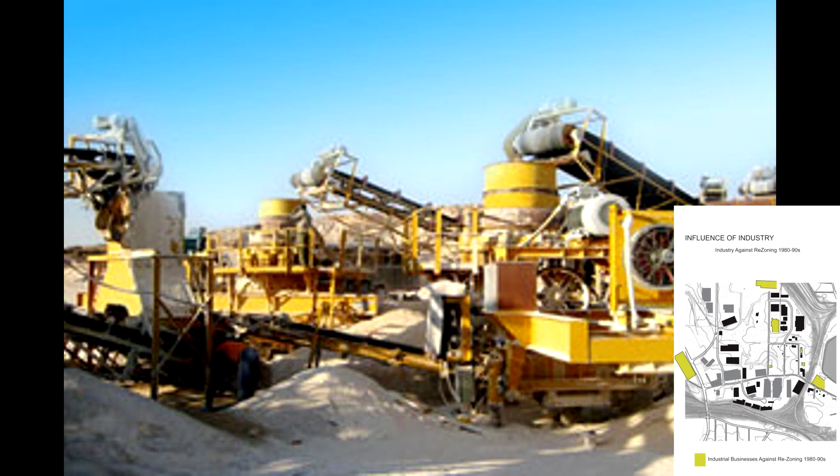Attempts to have it rezoned back into a residential district in the 1980s were defeated by large industrial companies, namely Nottingham Chemical. Blandtown is still zoned as an industrial area, but now most of the industry has relocated to other areas in the city, leaving many buildings on the existing site abandoned or underutilized.

In the last 20 years, a new demographic has appeared on site. The light industry has been replaced by the design industry that has taken advantage of a plethora of space given by vacant industrial buildings to use them as showrooms or inventory for high-end designer items. Along with this group are young professionals who, drawn to various hip restaurants and clubs in the area, have sparked new development as part of the growing West Midtown area.

New apartment communities provide housing for these young professionals, but they are turned inward and poorly activate the streetscape. The diversity of occupants can grow to further utilize the site if there were not environmental problems left on site from its heyday as an industrial district.

Due to the light industries that have polluted the site, the EPA has declared it a brownfield. Sustainability and the local ecology are central issues of the site and therefore this project.

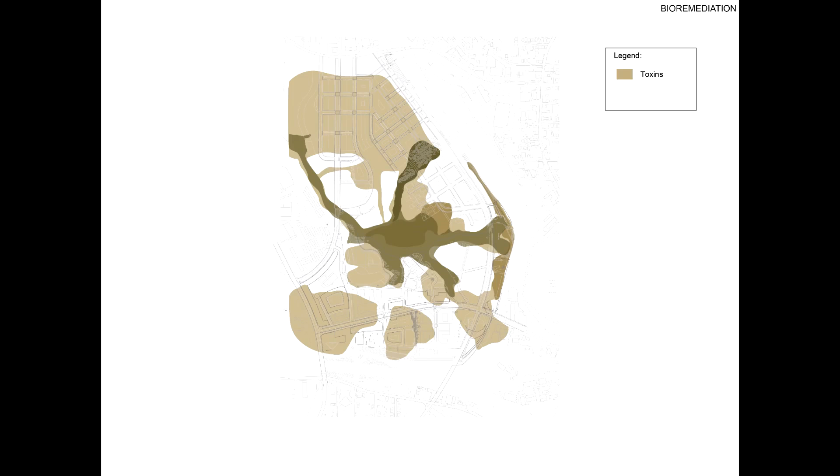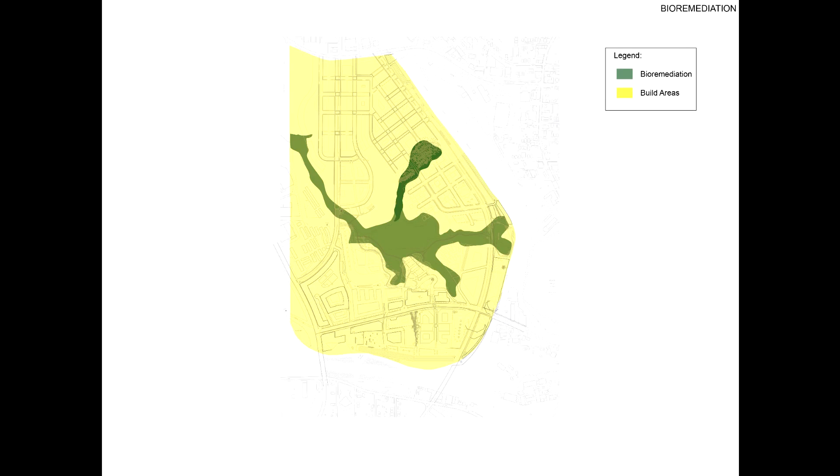In order to make the area safe, several steps of remediation taking an estimated 30 years will have to take place. The first step is to match and introduce plants that are effective in removing each of the toxins. This 4-phase remediation process will restore the soil and release land for development.

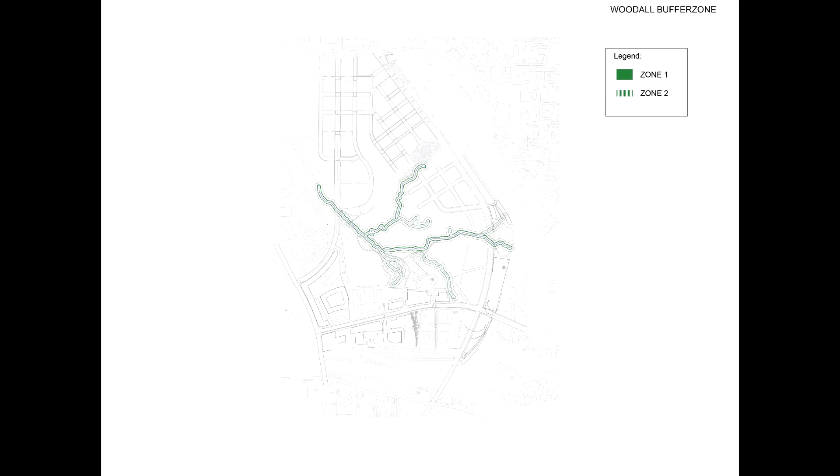Incorporating sustainable technologies was also part of the overall strategy. These included solar, piezoelectric, and water management systems.

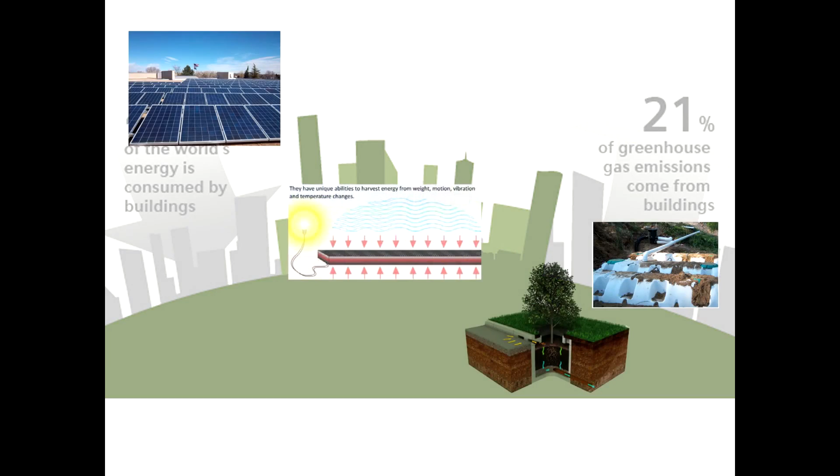In examining the amount of energy used by the average household, we found that a typical individual family unit uses an average of 11,500 kilowatt hours per household monthly. This approximates to 138,000 kilowatt hours per year.

We determined that it would take 6,300 kilowatt hours of stored solar energy to power 2,300 square feet, the size of an average household in Georgia. Tall buildings have much more energy consumption and therefore require 18,000 square feet of solar energy panels for an 11,000 square foot of occupied space.

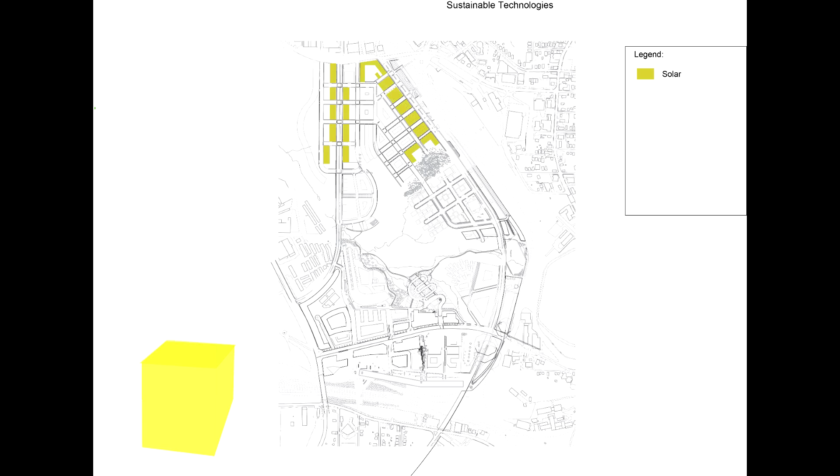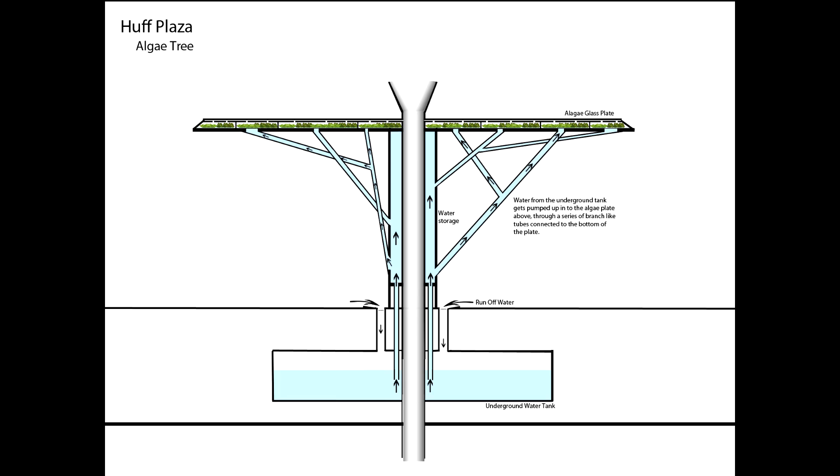Another renewable energy source used were algae trees. Algae trees are actually artificial structures designed to replicate the natural process of an actual tree in areas designed for human occupation. Algae trees utilize photosynthetic properties of microscopic algae by capturing sunlight, water, and carbon dioxide in order to produce biodiesel and generate electricity through the use of underground generators. The algae trees range from 18 to 20 feet in height and 24 feet in canopy span.

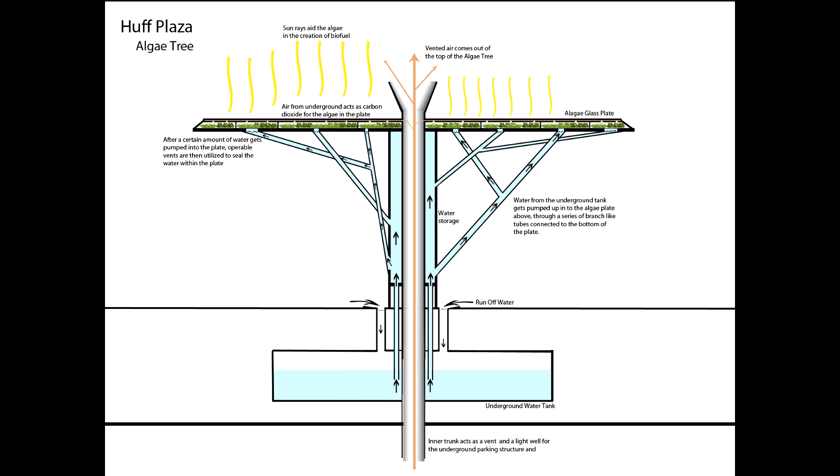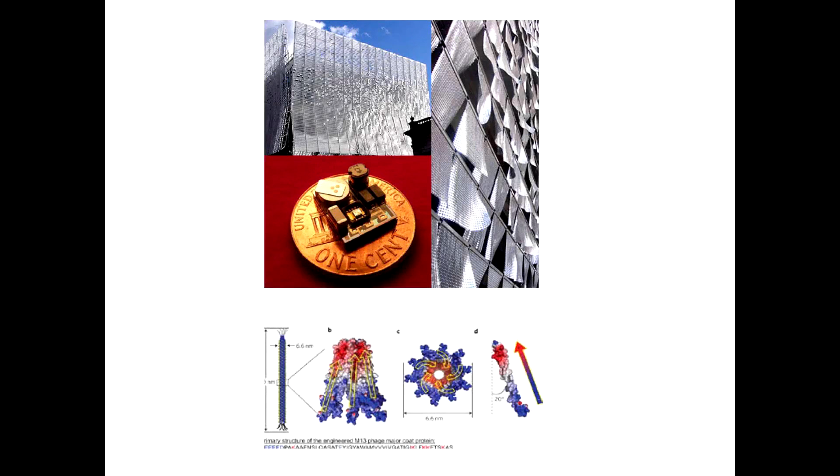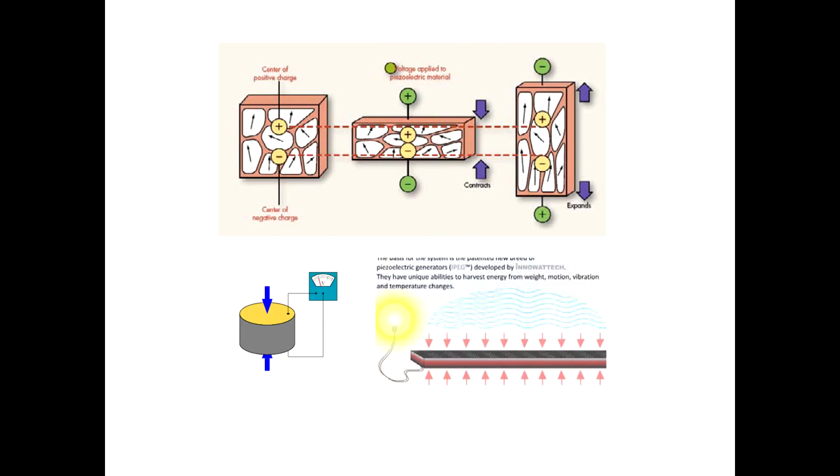Another renewable energy source utilized throughout the site is piezoelectric energy collection. Piezoelectricity consists of electricity generated by the pressure of the tiniest vibrations into an energy collection source. While Georgia is not windy, areas that are densely populated with vehicular traffic or rail lines provide enough wind gusts to activate a piezoelectric windstalk or fabric screen.

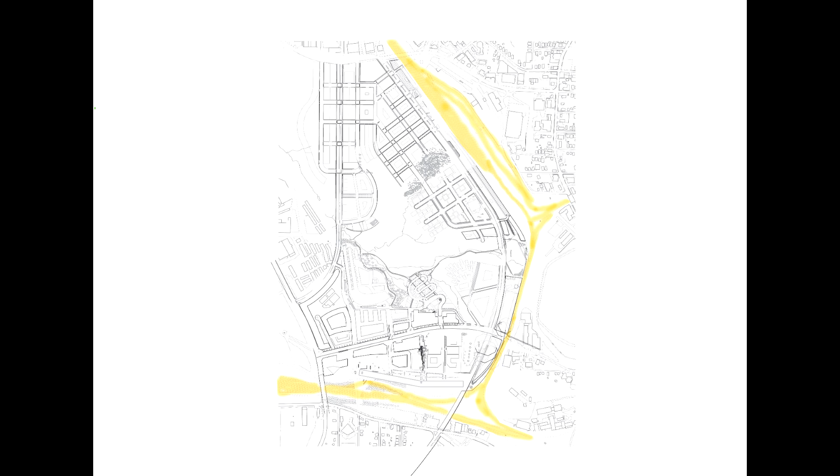270 square feet of piezoelectric fabric used as a building skin can create 34,000 kilowatt hours of energy per day. That is enough to reduce energy consumption of the large buildings on site by 26%.

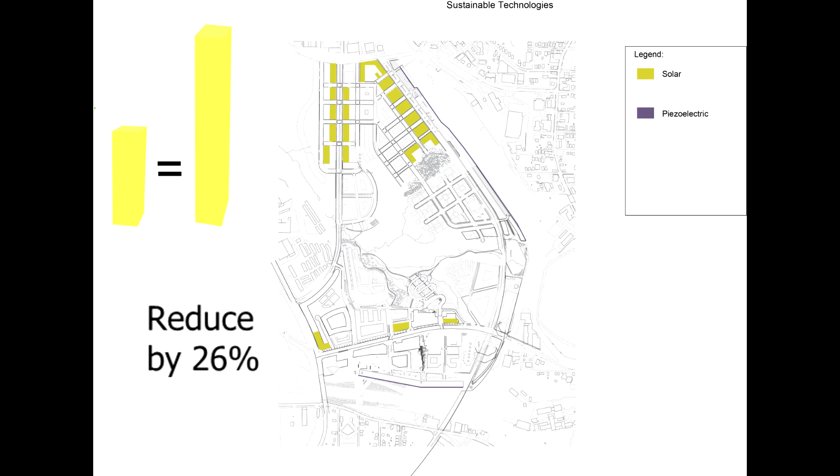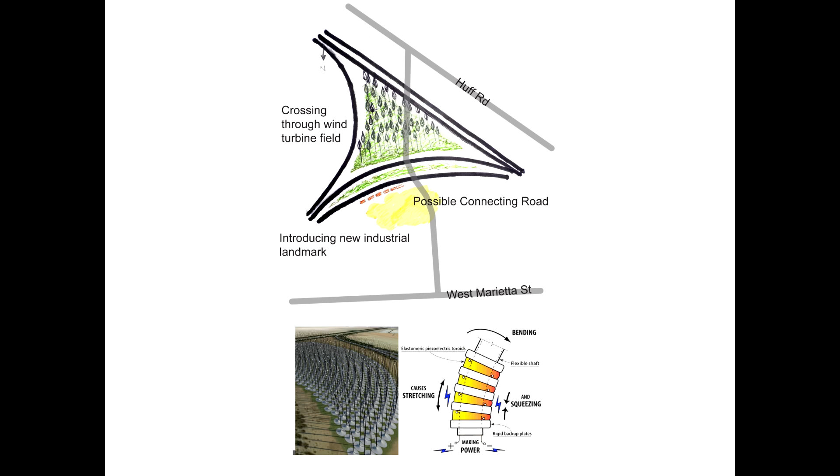The master plan incorporates a piezoelectric field in the southeast quadrant between the rail lines. The long mixed-use megastructures are also skinned with piezoelectric screens along the facades that face the tracks.

Sustainable water management was also important for the site. The average American is estimated to use 25,000 gallons of water per year. This means for the 15,000 inhabitants, the district will require 383 million gallons of water annually.

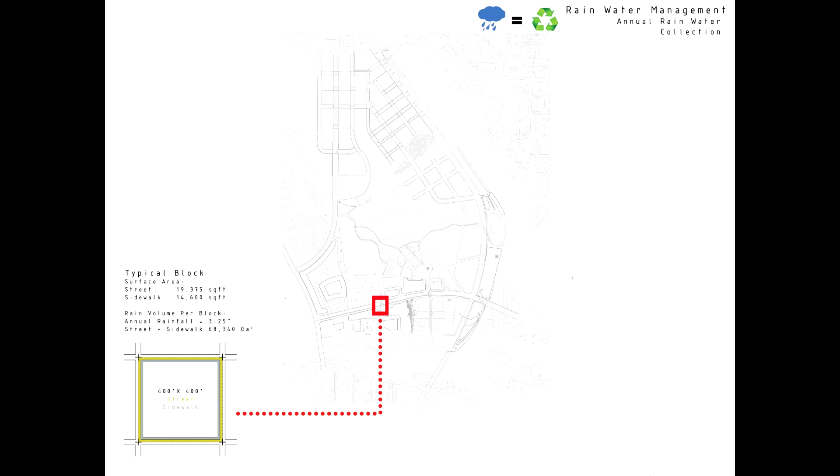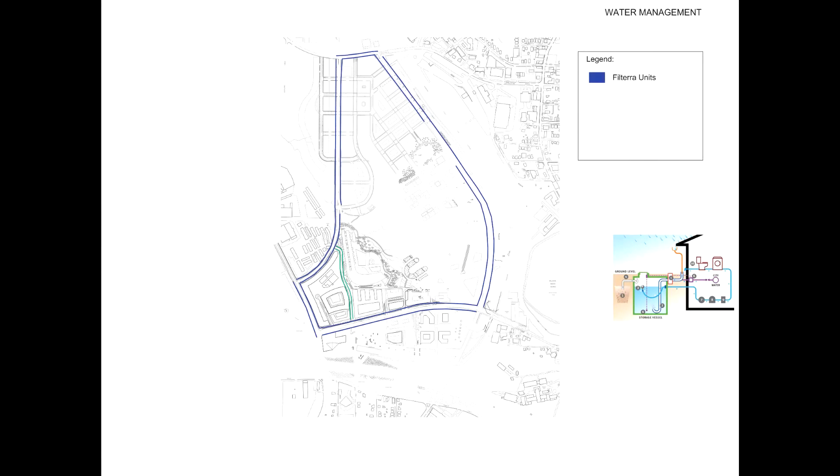In Georgia, the annual rainfall is 50.2 inches, which roughly translates to 31.12 gallons per square foot. At 13 million square feet, roughly 395 million gallons of rainwater falls on the site, a sufficient amount to meet the residents' needs. Our strategy called for capturing, filtering, storing, and reusing as much water as possible.

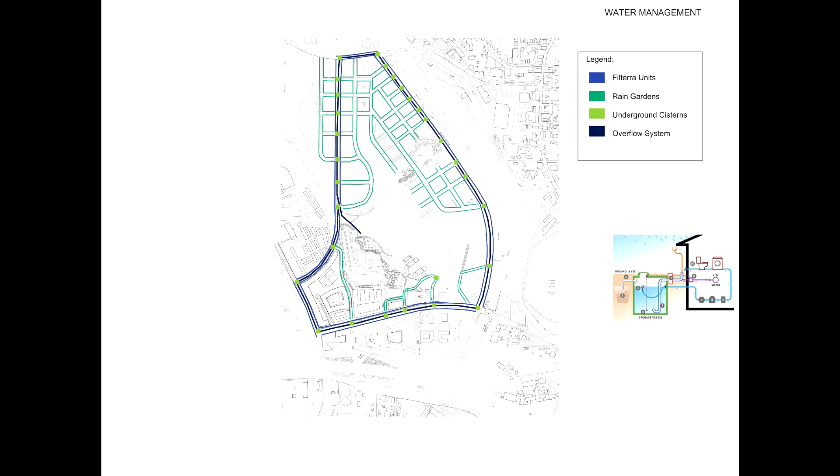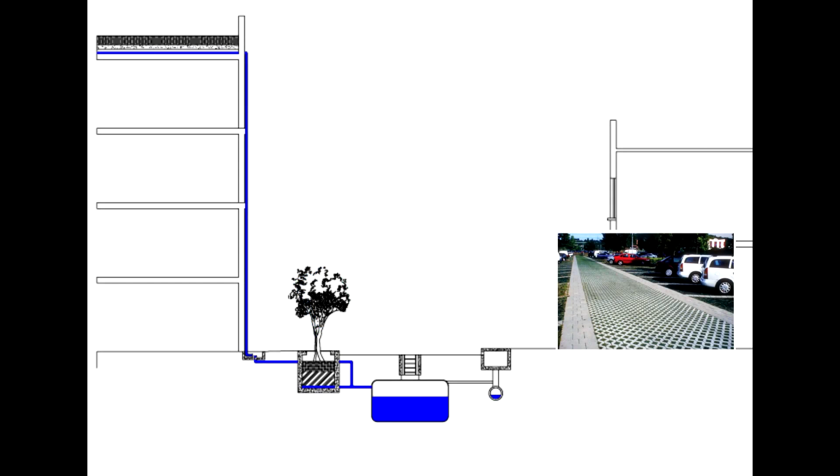The master plan incorporates approximately 100 million square feet of water gathering area, feeding the water collection and purification tanks throughout the site. This amount of annual water collection can reduce the need of external water by 50% for the entire 9,000 occupants. The stormwater management system will collect street water runoff, purifying it through a natural vegetation and soil filtration system before going into the waterways that feed the Chattahoochee River.

For a more subtle, yet constant water collection, fog catchers are strategically placed throughout the site. With this method, the humidity in our climate can be used to our advantage. Fog catchers are composed of a mesh fabric that collects dew in the atmosphere and allows it to trickle down to a cistern at the base.

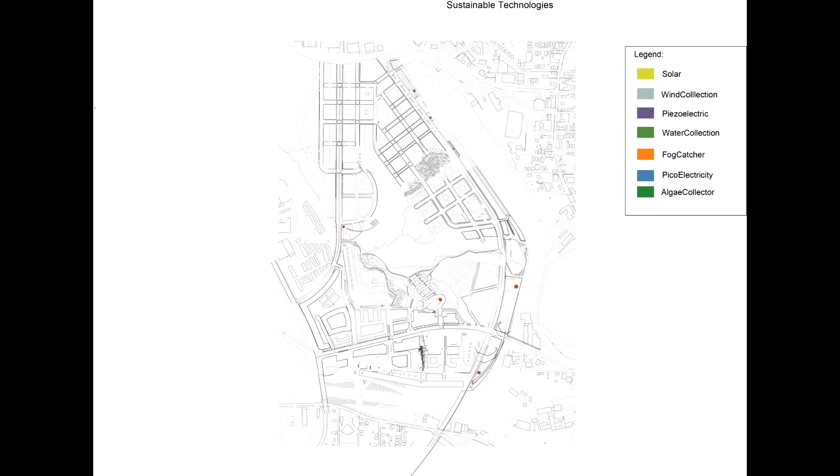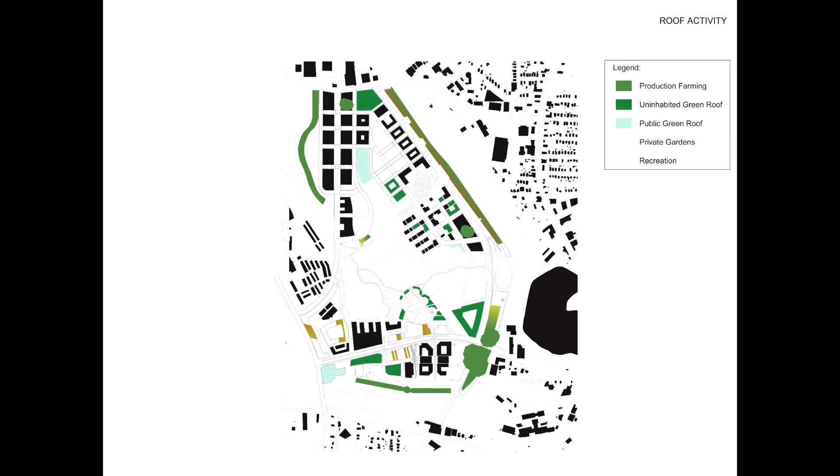Green roofs are also a component of stormwater management. Not only do they utilize water that falls onto the roof to nourish the plant life, the green roofs also naturally filter and provide gray water for the building once the water collected and used for plant life reaches capacity.

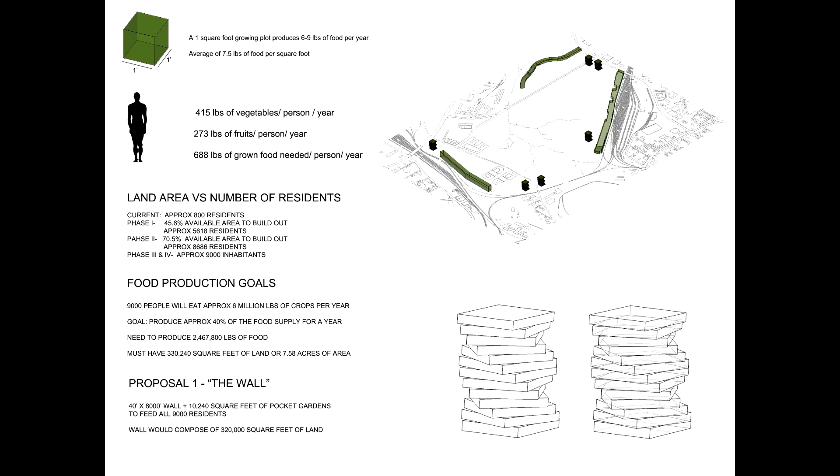Carolyn Steel's lecture, How Food Shapes Our Cities, presents the argument that there is a huge need for farming within the cities so that individuals may maintain a replenishing and healthy diet. To complement the sustainable energy systems, we decided to incorporate urban farming, which will provide approximately 40% of food source for the occupants.

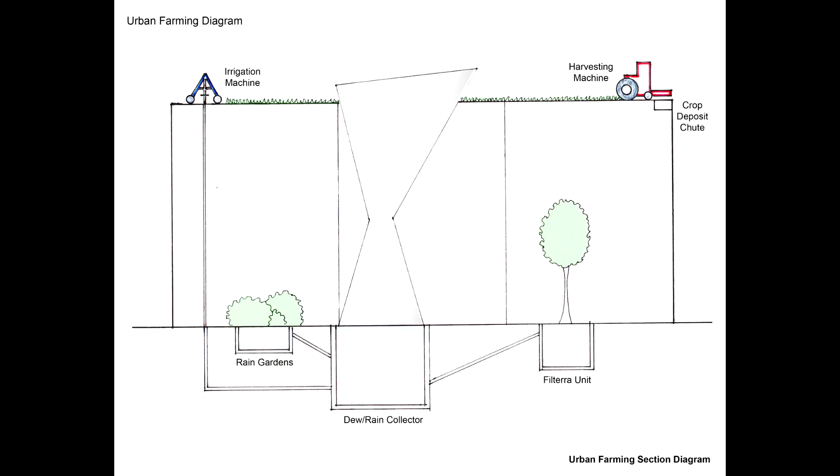Two types of industrial agricultural infrastructures were used to address the needs of food sustainability in this district: the rooftop promenade and the vertical farming towers. The roofs of the megastructures are dedicated predominantly to industrial agriculture. An extensive promenade provides visibility and access to the production while simultaneously providing panoramic views of the area.

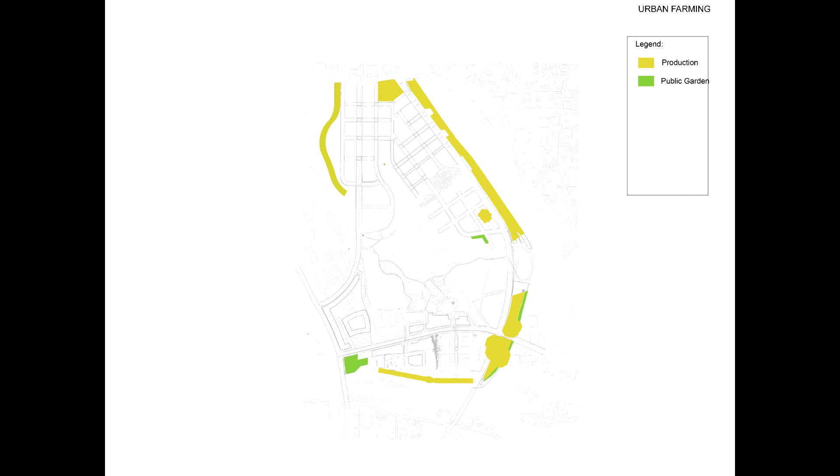To supplement the megastructures, vertical farming towers were also used. These vertical green structures act as gateways into this district and signify the change from the existing culture to one that is more sustainable. The site contains several distinct topographical features that were taken into consideration in the master plan.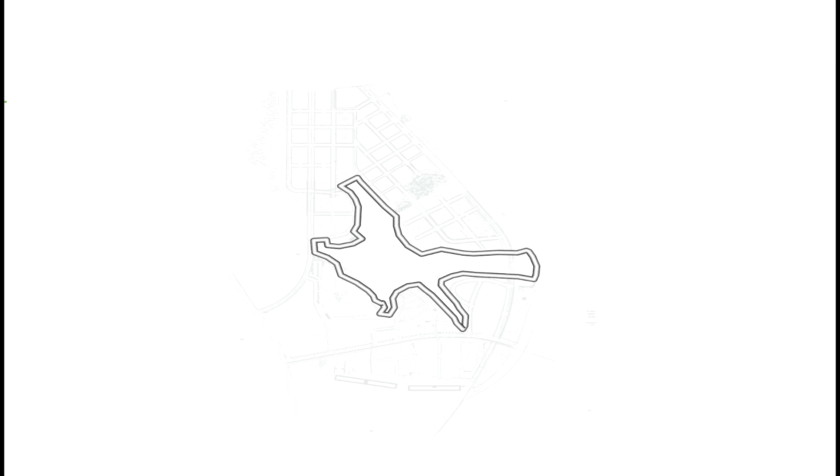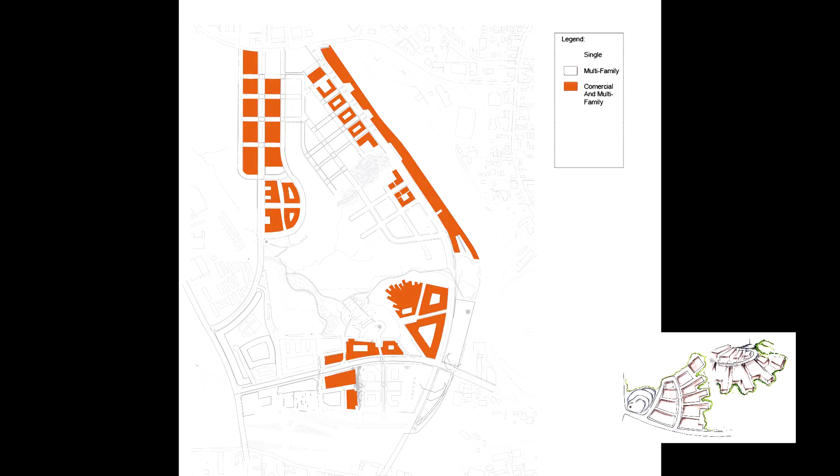Steep slopes along the edge of the Woodall presented roadway, development, and accessibility challenges. In these areas, we incorporated single and multi-family housing that stepped down the slopes like fingers, holding the natural landscape. These defined areas for pedestrian paths that move alongside the topographical changes into the Woodall.

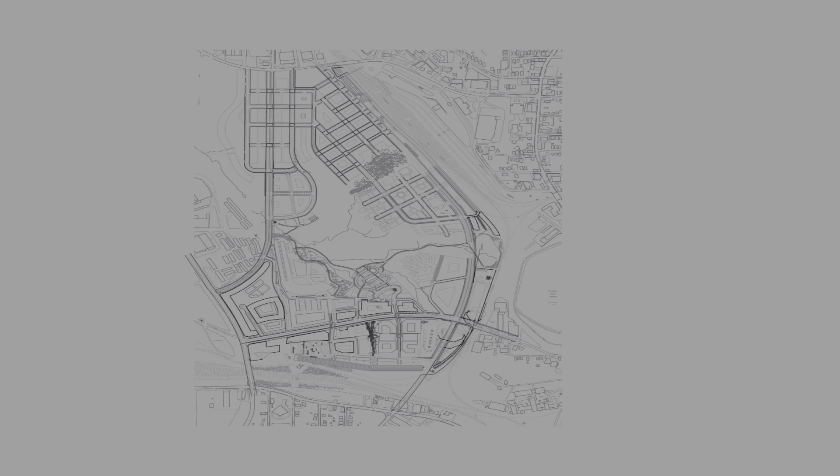There are very steep areas growing outward from the low-lying waterways. These steep areas have to be addressed one by one in the overall design.

Blandtown is surrounded by two major rail yards that provide the initial perimeter of the site. The rail lines provide a unique curved boundary and act as a large barrier against connectivity with the rest of the city.

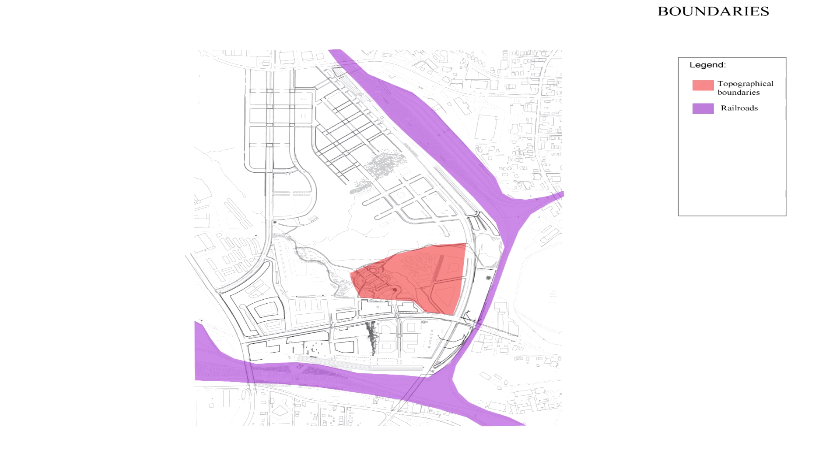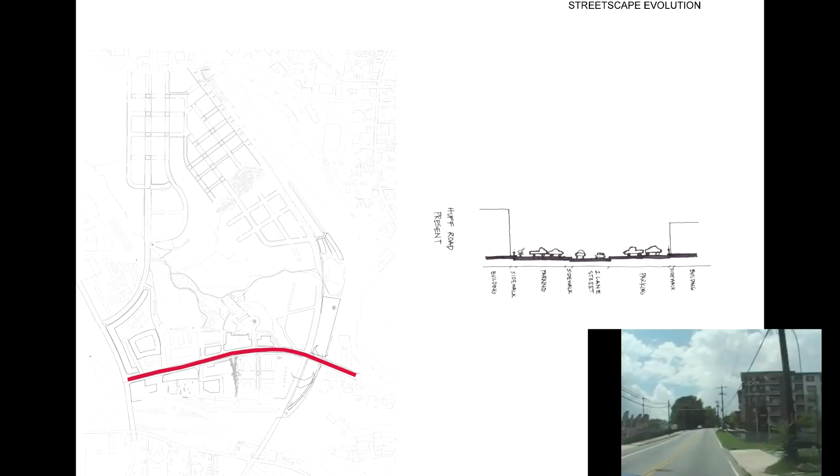The current vehicular connections over the railroad lines are Huff Road and Marietta Boulevard. These are maintained as arterials to the site in our proposal. Huff Road is currently not sufficient for either vehicular or pedestrian access through the site. To address this issue, we propose to change it from a 2-lane road to a 4-lane road, improve pedestrian access, and introduce mass transit lines.

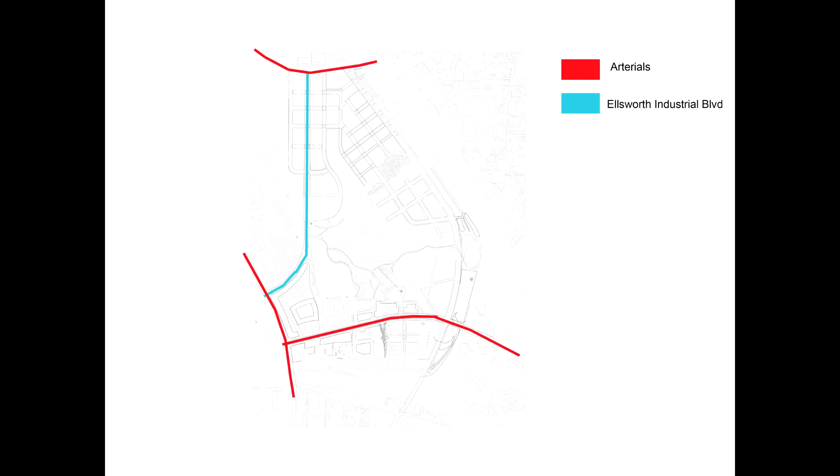As the density increases, we propose to improve Ellsworth Industrial Boulevard to support the growth of the district and allow for the arterials to breathe during peak traffic hours. Finally, we have pulled Herndon Street north through our site and connected it to Chattahoochee Avenue to provide a third arterial road.

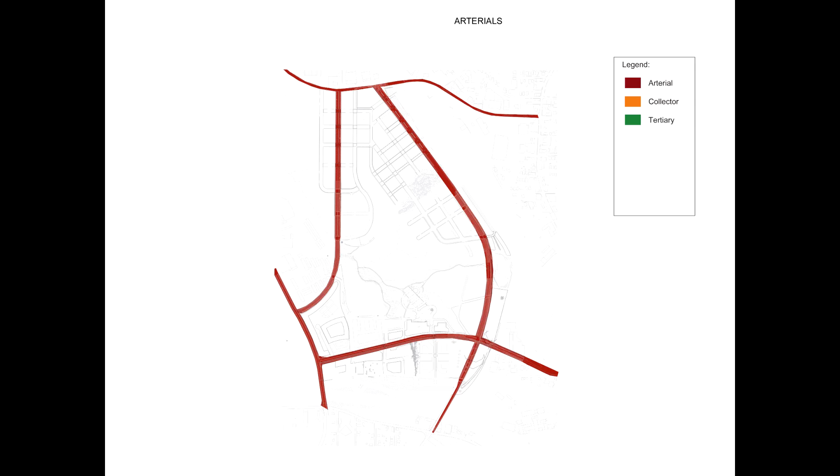Since our design focus is to create a pedestrian-oriented city, the block sizes are approximately 200 feet wide, allowing for a comfortable walking distance. The block sizes help to determine the need for secondary and tertiary streets throughout the site.

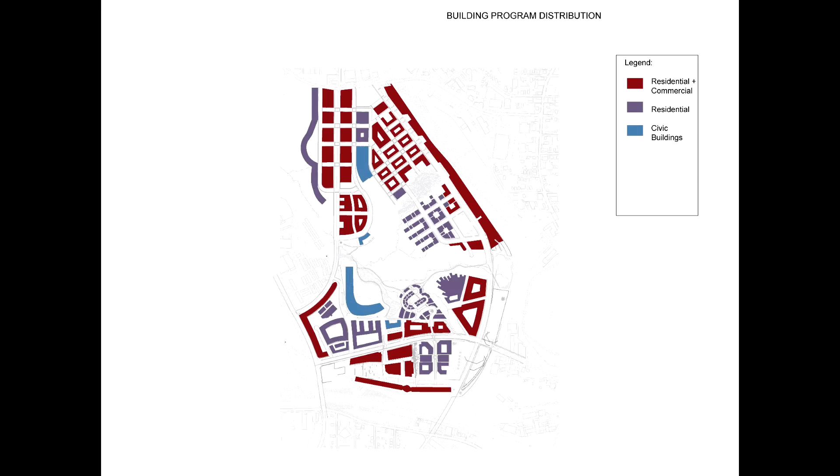Close attention was paid to population density regarding arterial streets and residential streets. The program for arterial roads consists of ground floor office buildings, which are mostly public, and retail. The tertiary streets function as residential streets in more privatized neighborhood areas.

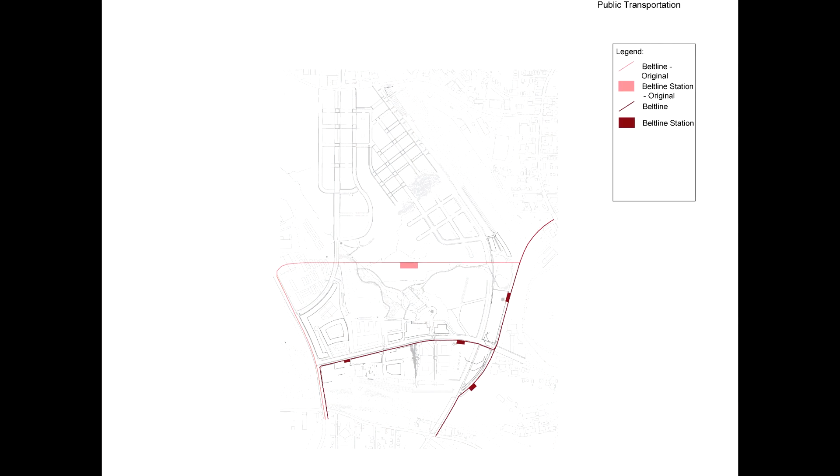To discourage the use of the vehicle, we have incorporated two forms of mass transit within the site. The first is the Atlanta Beltline, while the second is a trolley system that moves throughout the site. Pedestrian streets, green streets, bike lanes, and jogging trails have also been incorporated into the design.